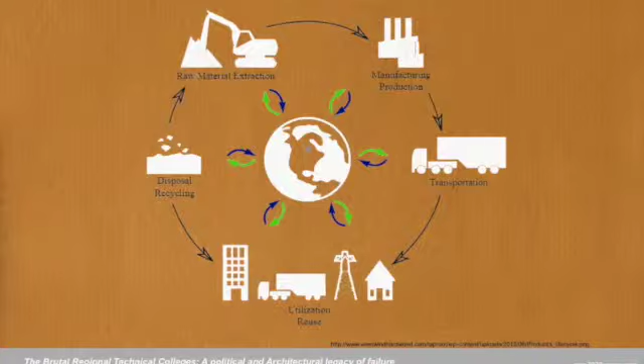From setting out in late 2008 exploring topics of low energy retrofit to today, the long journey of research has been tumultuous. At the outset, I packed my baggage of opinion and bias. As co-commentators on my travels and travails, we would encounter the low gullies and high cliffs of contradiction and affirmation. It became clear to me that an invisible potential may be buried or concealed in my research building. Hypothetically, this potentiality could impact design decisions for artifact retrofit and outcomes of the research.

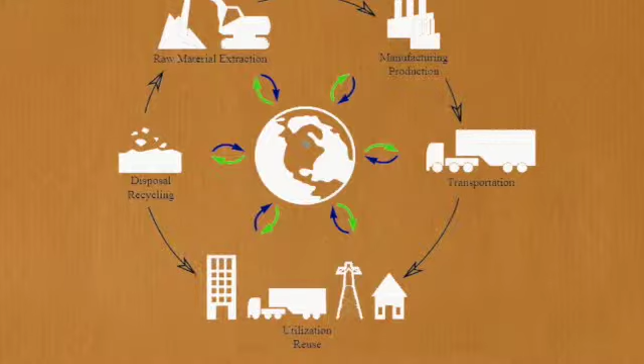I first faced the question of why do we constantly replace buildings without studying the potential for their reuse. This question of retrofit and reuse in the design process seemed to be less measured and less involved than new build. However, in the context of energy, each existing building represents an investment or cost in embodied, operational, and end of life energy. The focus of my research would be the regional technical colleges. To consider retrofit methodologies, we had to elicit their potentiality.

I soon discovered that my friend's opinion and bias had to be ejected from the research bus and left at the curb. I had to rebuild a picture of the forces that shaped the design and construction of the regional technical colleges in order to both discover the new potentialities and value the existing structure. The socio-political environment may have impacted the architectural intent of the building.

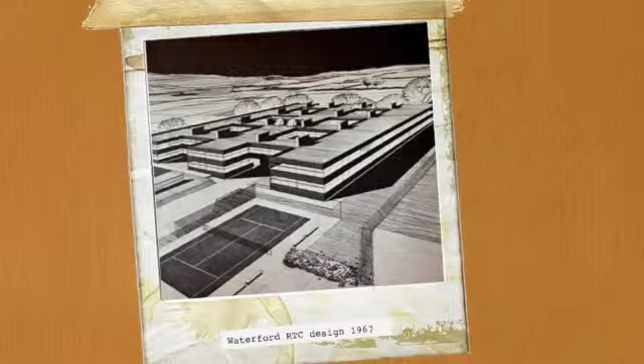1960s Ireland was a much different place, where social inequity was underlined by massive disparities in third level access. With a low level of technical graduates threatening a fledgling economic revival, this influenced the government plans to establish a technical education sector. The political and physical response was uniquely expedient and opportunistic, but compromised in haste and expenditure. The resultant architecturally brutalist buildings were inadequately equipped to cope with the post-oil crisis world, like many of its precedents.

The architectural language and technologies that would inform the RTCs can trace their origins back to the turn of the 20th century, where a maelstrom of change was in the air of society. At the height of the Art Nouveau movement, some architects were seeking a more honest and less embellished direction to inform the future of architecture. As Art Nouveau was in its prime, a few scholars like Hermann Muthesius argued against the extravagances and over-decoration in favour of a more rational and utilitarian approach. This was called New Objectivity.

Soon after, he would set up the Deutsche Werkbund, where, amongst others, Peter Behrens, a prominent German architect in the Art Nouveau movement, would design the AEG turbine factory in Berlin in 1909 in the style of industrial classicism. Behrens' subsequent design language would influence his assistants Adolf Meyer and Walter Gropius. The Gropius-Meyer Fagus building of 1911 to 13, which would be christened the first modernist building, bore striking resemblances to the AEG precedent, in a regular fenestrated grid laid out in vertical panels, but with less relief.

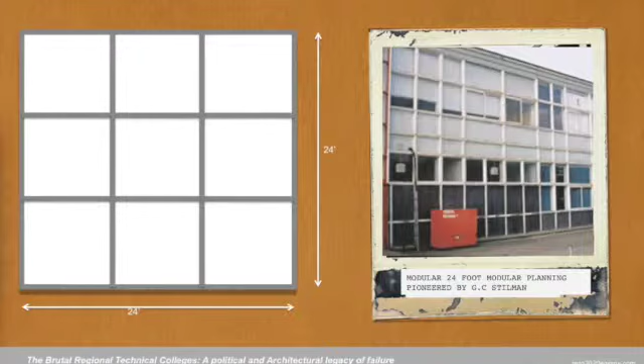Post-war London saw the development of the new towns, and G.C. Stilman pioneered non-traditional steel grid structures for primary and secondary education, based on 3 bay modules of 24-foot by 24-foot classrooms. Prefabricated steel structures with external cladding or infill panels resulted in a very fast construction pace, which was considered very successful by London County Council.

The external horizontal precast concrete infill panels replaced the traditional brick. The aesthetic was particularly brutal and ugly, but effective, modular, and fast. The new Labour government faced a lack of traditional materials and skills, and urgent needs of post-war rehousing and education, thus prioritised speed of construction over cost.

The subsequent British government cut educational spending by a third in 1951, prompting an analysis of materials and construction techniques. The separate elements of a building, the foundations, steelwork, cladding and roofing, were priced independently. The Hertfordshire light steel frame cost approximately £3.5 million for a typical construction. An equivalent school constructed from concrete frame cost approximately £1 million, and a traditional load-bearing method of brick, still in short supply, cost £0.5 million.

The clear advantages of the industrialised system came in its speed of construction over the traditional methods, but at 7 times its cost. Before the Conservative government budget cuts of 1951, the Smithsons had started construction of Hunstanton School in 1949, which was heavily influenced by Mies van der Rohe's Chicago IIT buildings, which had featured in the Architectural Review of 1946. Where Mies's work at IIT was refined and taut, the Smithsons' work at Hunstanton was raw and brutal.

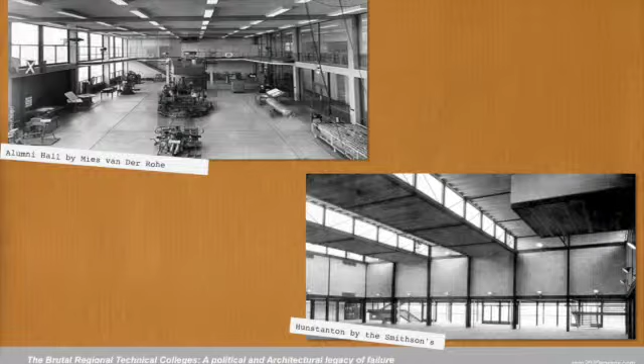The construction was expressed with each exposed weld, bolt and pipe. Hunstanton is more honest than Mies's work. What you see is a true structural frame, welded on site to make a continuous plastic structure, to save steel. The standard sections, though large and in short supply, were relatively cheap. The brick end walls braced the structure, and inside the finishes and pipes are all exposed.

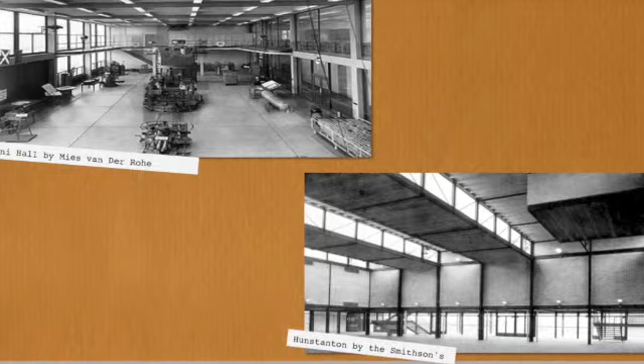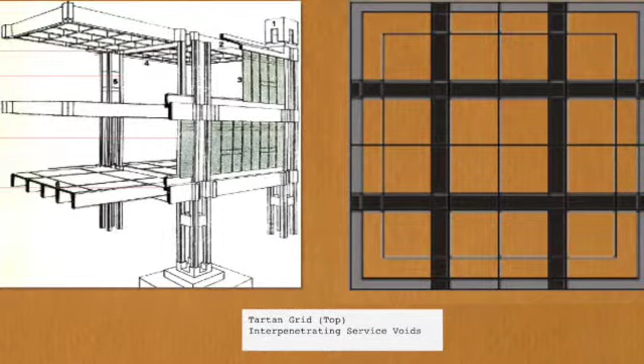In 1963, Arup Associates, a collaborative multidisciplinary practice, was formed under principles of total architecture. Their first project, the Mining and Metallurgy Building at the University of Birmingham, was designed by architect Philip Dowson, with particular attention to adaptability and servicing. The project was designed around 5 interlinking pavilions, as space defining rather than object. Each pavilion was based structurally on a tartan grid with extensive prefabrication of concrete elements.

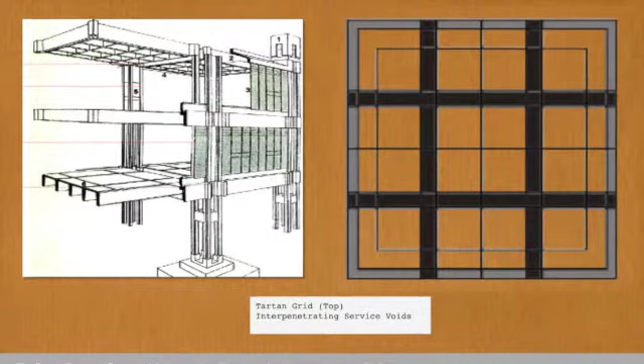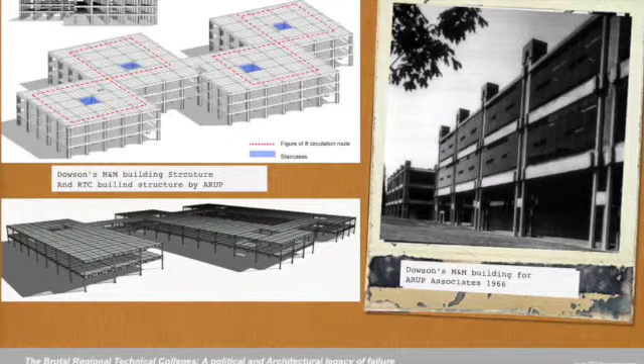MacDonald argues that Dowson consciously used concrete to moderate internal thermal environments to shift the diurnal cycle of heating and cooling. The project, completed in 1965, went on to win plaudits for their clarity, logic, and elegance, winning the 1966 RIBA Architecture Award for the West Midlands.

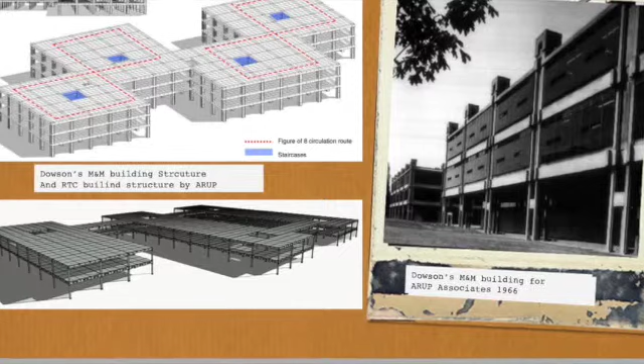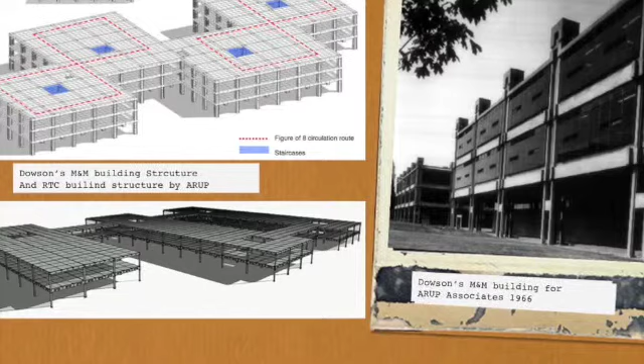The highly glazed facades had little in the way of shading. The concrete structure was expressed, but had a thermal mass functionality and would prove more durable than its steel predecessors. The template would directly inform the design of the RTCs in Ireland, as Arup were common to both design teams.

In the mid-1960s, Ireland was on an economic upswing, and the new Minister for Education, Donogh O'Malley, set about an ambitious building programme establishing regional technical colleges to address a massive social inequity whereby a child was 68 times more likely to go to college if they had upper-class parents than those of manual classes.

He grasped power from the local church-dominated vocational groups. Making an executive parliamentary decision, he announced his intention to set up the RTCs in 1966, quickly establishing a steering committee to inform the design brief. This move emasculated an existing Commission on Higher Education established by his predecessor, whose recommendations on a new third-level structure remained unpublished.

In the existing regional appointments, O'Malley handpicked a team he wanted for the largest multi-site construction project in the history of the state, under the guidance of Desmond McCreevy, a close friend of O'Malley's and political party chief fundraiser. The new design team was formed by a consortium called Building Design Associates and included people like Michael Scott, Arthur Gibney, J. Coleman Healy, Owen Kennedy, Arthur Main, and Arup's leading engineer in Ireland, Jock Harbison.

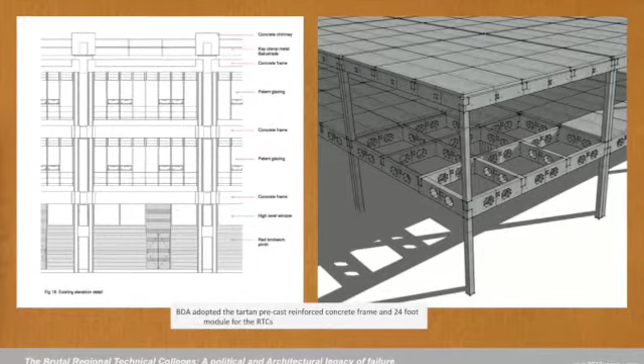Faced with such a plain-speaking, unwavering client and impending deadlines, the design team research trips were delimited to London County Council and Birmingham University. The trip may have been informed by Irish architect John Burgess, a member of the team who had worked in London on new towns, and of course Arup Associates, who had worked on the M&M building.

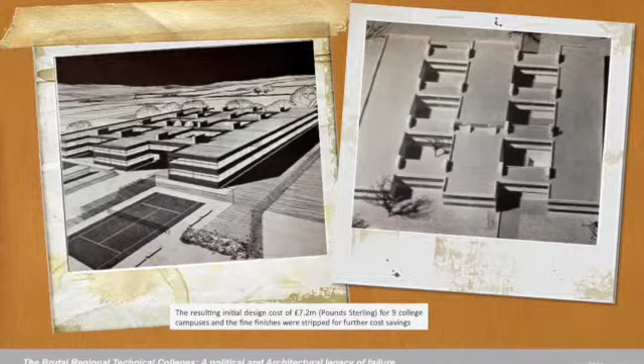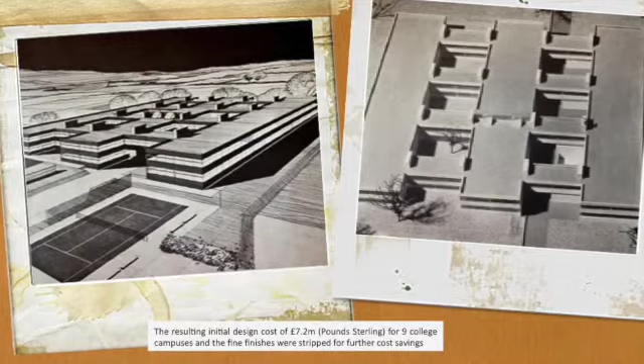Expeditiously, BDA adopted the tartan precast reinforced concrete frame and 24-foot module for the RTCs, and combined it with a more cost-effective prefabricated concrete cladding system which effectively concealed the structural grid. The initial design proposed by BDA in March 1967 had less than 5 months for design and research. It was budgeted and presented to Parliament at a cost of £7.2 million sterling for 9 college campuses, for which further savings of 16.4% were demanded by the Oireachtas.

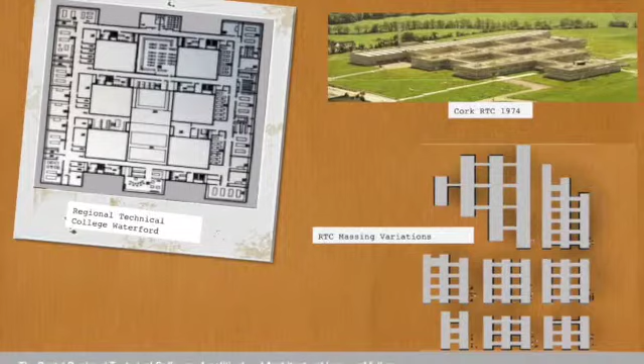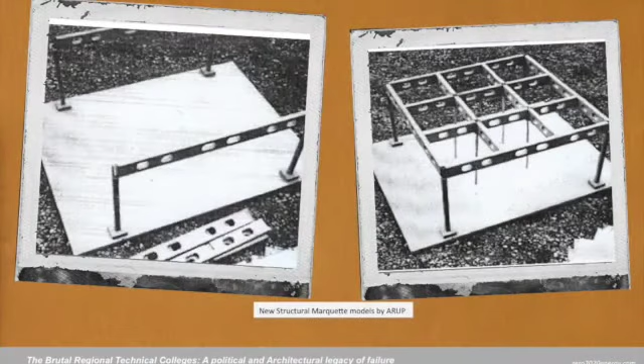The original design lacked relief, and depended on material quality on the interior. The precedent baseline interior of parquet floors and cream brick walls was replaced with poorly fabricated fair-faced concrete block and linoleum flooring. Equipping budgets were all cut back, and independent columns would now be cast together for efficiency, abandoning one of Dowson's servicing objectives.

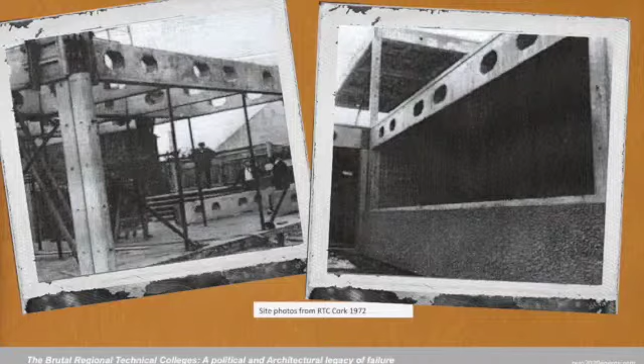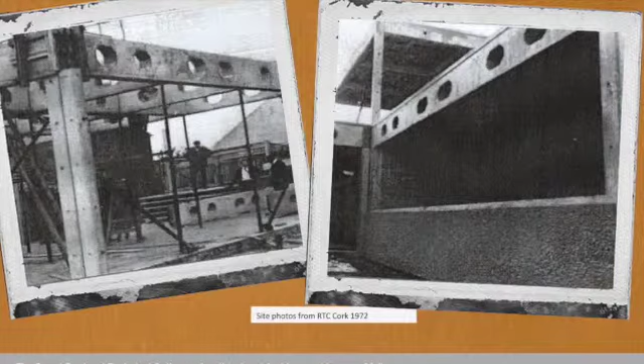The resulting design, which differed in outward aesthetic, quality finish, and firmness from its UK precedent, progressed apace to site with different project teams. A unilateral decision made by the minister had resulted in a single concept design team for all 9 sites, and then the political backlash resulted in different project teams for the same sites.

The lack of continuity between the design and construction teams may have separated the implementation from the ethos of the precedent template. A lack of design and fabrication experience in industrialized prefabricated buildings may excuse the poor workmanship and finish evident from the concrete casting and block walls of the RTC.

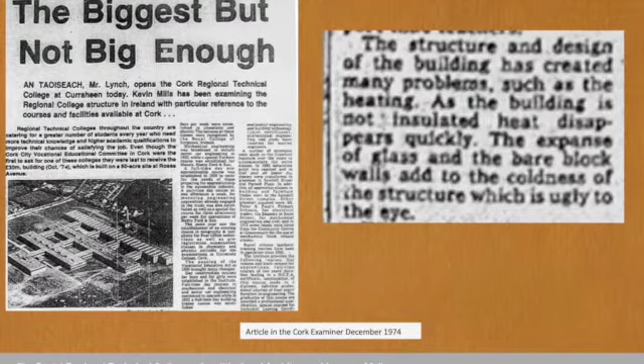The regional technical colleges completed between 1970 to the close of 1974, in the midst of the first oil crisis. On the opening of the last building, a newspaper reported that the structure and design of the building had created many problems, such as the heating. As the building is not insulated, the heat disappears quickly. The large expanse of glass and bare block add to the coldness of the structure, which is ugly to the eye. The double-loaded corridors and limited natural ventilation was not fit for purpose from the outset.

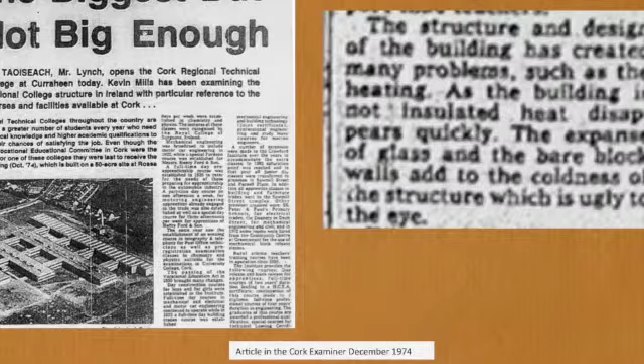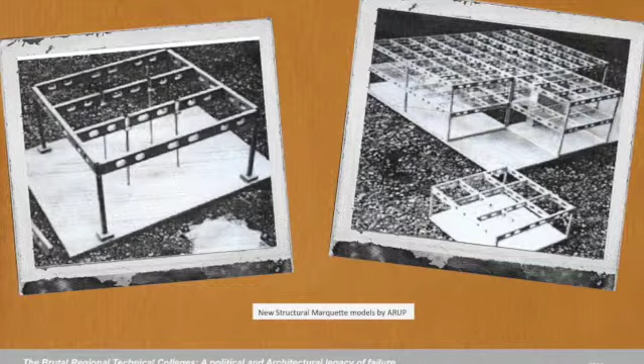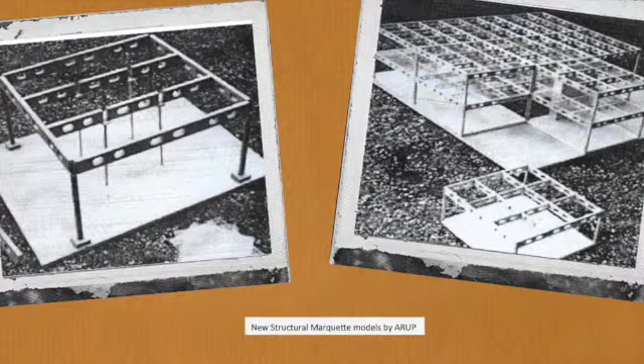The lack of shading and expansive glazing caused a lot of heat gain and heat loss. Massive internal summer overheating, often 36 degrees, with a lack of assisted ventilation, create oppressively inhumane working environments. The inadequate central heating system never reaches minimum thermal comfort levels in the winter. The highly air permeable envelope caused fast heat loss but did mitigate CO2 buildup. As a result, the thermal mass cools quickly and prevents the building from achieving adequate thermal comfort levels in winter.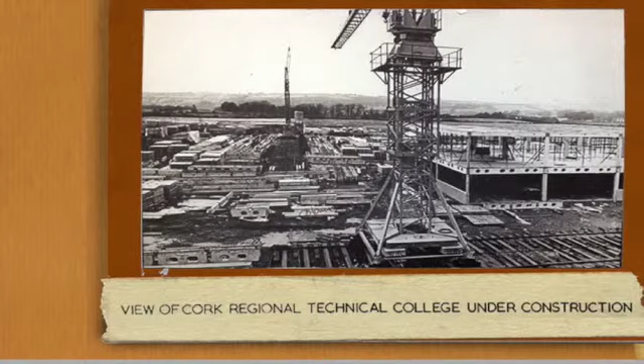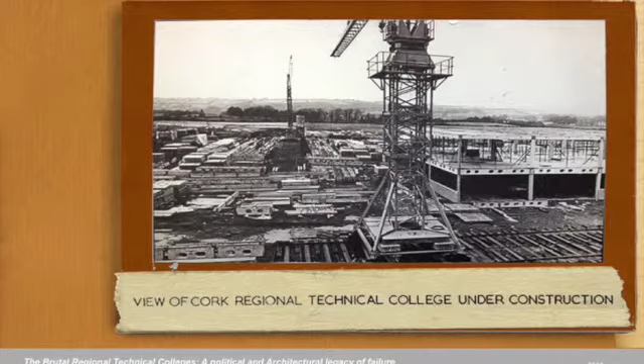Part project funder, the World Bank, conceded in the wake of the second oil crisis that the design had serious faults, particularly with regard to high energy consumption. Basically, there had been an inadequate cost provision to meet environmental, heating and ventilation engineering needs. A design with a high percentage of single glazed windows, inadequate roof insulation and no thermal control have caused high costs in use, exacerbated by the international energy crisis. In 1967, the Cork RTC budget was £1.45 million, which more than doubled to an eventual cost of £3.2 million.

Successor to the RTC typology, the steel clasp industrialized systems suffer from rust to structural members, limiting their practicality for retrofit. The precast concrete RTC typology suffer from delaminated cladding, deteriorating seals, poor airtightness, high surface condensation, and high energy costs. However, the main concrete structures suit flexible internal replanning and adaptation to a mixed mode, highly insulated building with natural ventilation and the use of exposed thermal mass to achieve low energy performance, improved indoor air quality, and thermal comfort.

The utility of what we call modernist, functionalist, and brutalist architecture is compromised by an overemphasis on geometric form over technical function. Despite the internationalist aspirations to technical rigor in their commercial buildings, the performance of these buildings tell a different story. Buildings like Mies' IIT campus, the Smithsons' Hunstanton, and Dowson's M&M building all have beauty in their functionalism or brutalism, but all suffer from compromised environmental performance due to an emphasis on style. Gropius had warned on a trip to UCD in 1936 that the imitation of modernism would be distorted by political misadventure, and such a distortion would result in the inadvertent loss of the truth and simplicity of modernism.

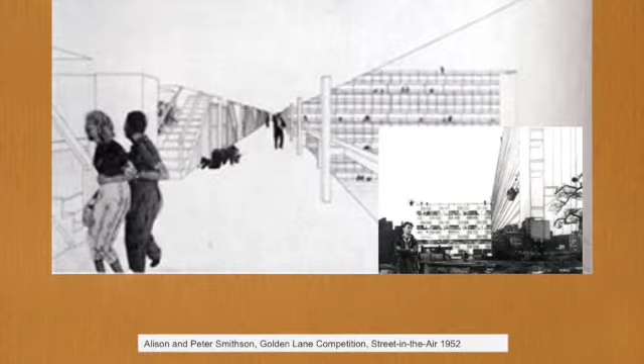The concealment of the structural grid and the overemphasis on cost rationalization in many industrialized system builds of the 1960s led to a visual squalor, devoid of humanity, where the medium is the only message. In retrospect, it is sometimes difficult to perceive why buildings are the way they are. The fashion of brutalist and industrialized architecture were of the era and promised a more egalitarian world. But like all things, they can be easily corrupted by politics and myopic decision making.

The lack of both architectural continuity and adequate time to properly detail the RTC design scheme meant that the largest multi-site development in the history of the state became a cold and emotionless epitaph to a once colourful politician. The result is a cold and uninspiring space that has become a victim to politics and drudging. For all the haste and cutbacks, we've been left with a second class institution in second class accommodations, compromised by a political expediency, burdening all users with a legacy of greater cost and lesser utility.

I will finish with Norman Foster. As an architect, you design for the present with an awareness for the past, for a future that is essentially unknown. Thank you.